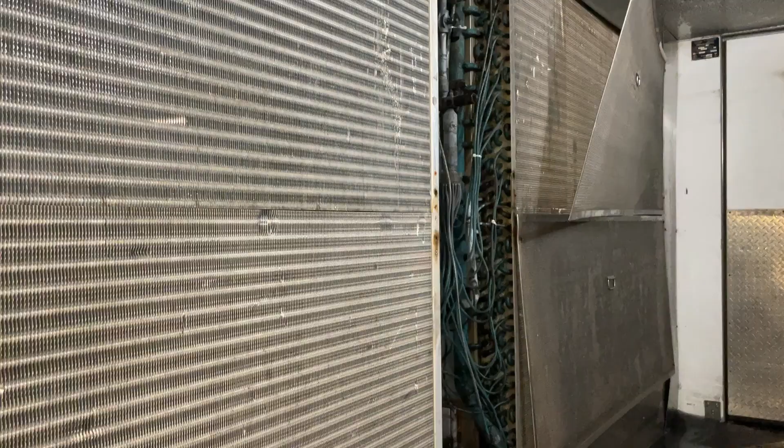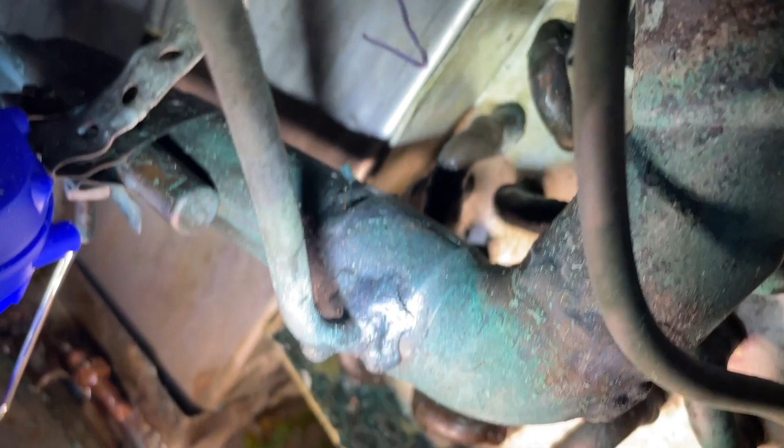Working in this big blast chiller today on this coil that has a really bad leak, and it's leaking right, no, that's not in focus, but it's leaking right there. You can kind of see where that U-bend is almost like cut down into the steel.

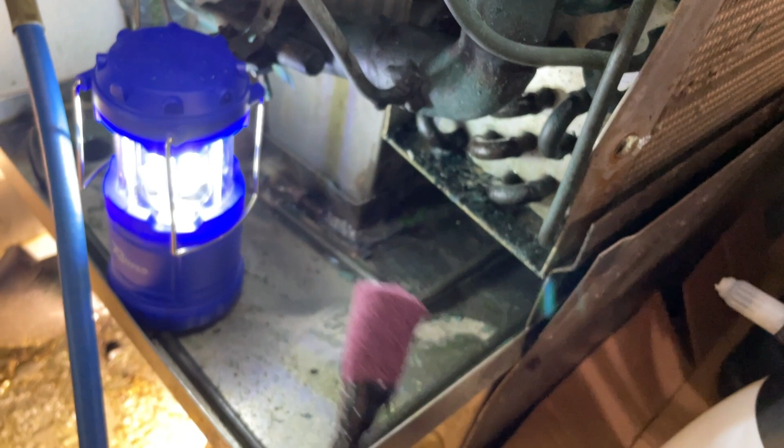The plan is going to be to clean it up really good, and taping a Scotch-Brite pad onto an extension is one of my favorite ways, although it's still very difficult to clean that way. And then we're going to flux it really well and use Safety-Silv on it. And the idea is just to bond the metal to the copper, and in the process fix the leak. So we'll see how it works.

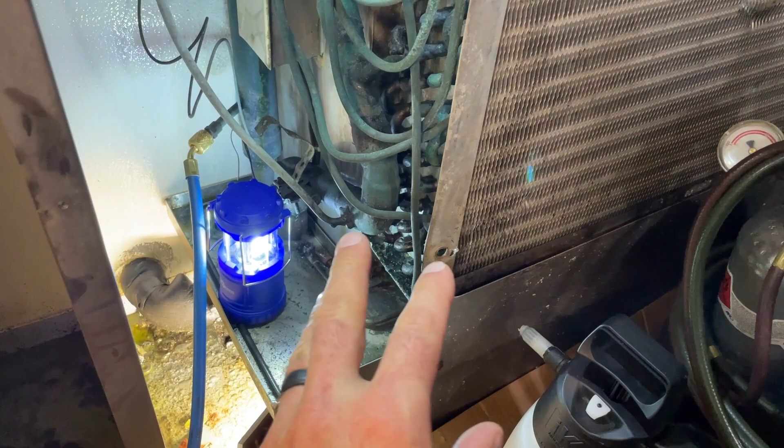If it doesn't work, and I've showed this before, we'll just have to eliminate that circuit. I'm not even sure this coil's made anymore. This unit's like from the 80s.

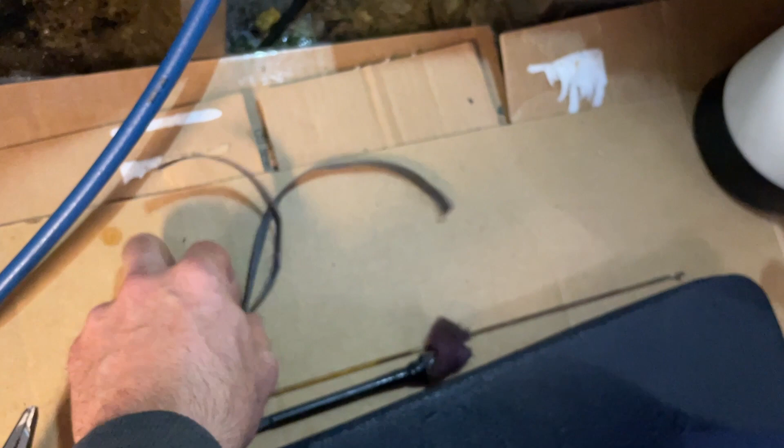I've got it cleaned up now as good as I can get it. So I used the bit and also a really long, narrow thing of sand cloth, you know, doing the whole back and forth saw action, and then of course rolling it up and using some needle nose to get in there.

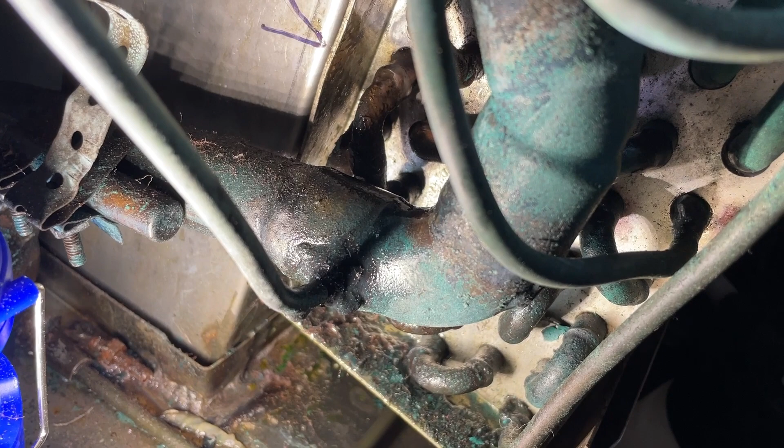So now it needs flux, because you have to use Safety-Silv on steel. You can't use anything with phosphorus because it'll create iron phosphides. Anyways, you have to use the flux, because without the phosphorus, you're not going to have any fluxing action whatsoever.

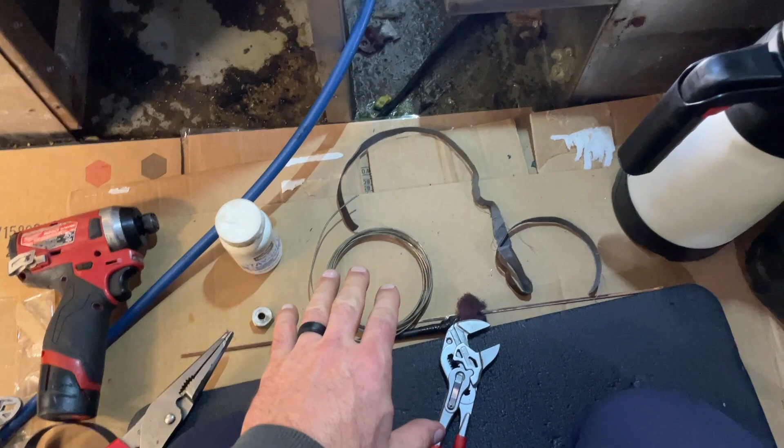This is Safety-Silv, and it's like 45% silver and the rest is copper. It flows really nicely. In fact, it's better for this because it'll flow in. Sil-Fos is better for filling gaps and things like that.

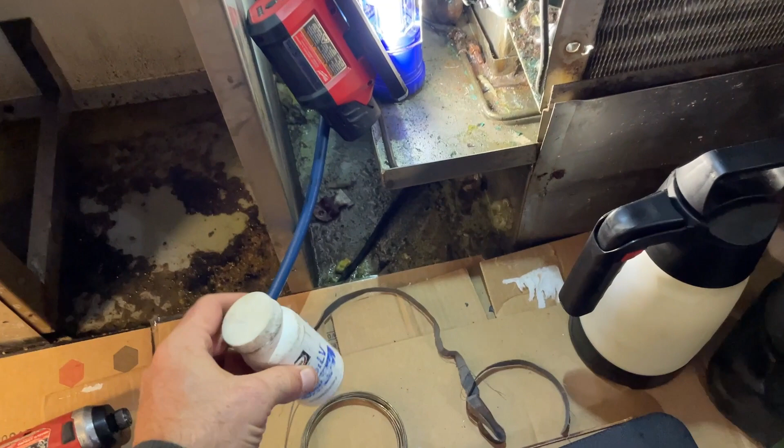And this is the brazing flux I'm going to be using. Harris also makes a black brazing flux, and it has a higher activation temperature, and it's really good on stainless steels and things that you have to get a little hotter than normal to braze.

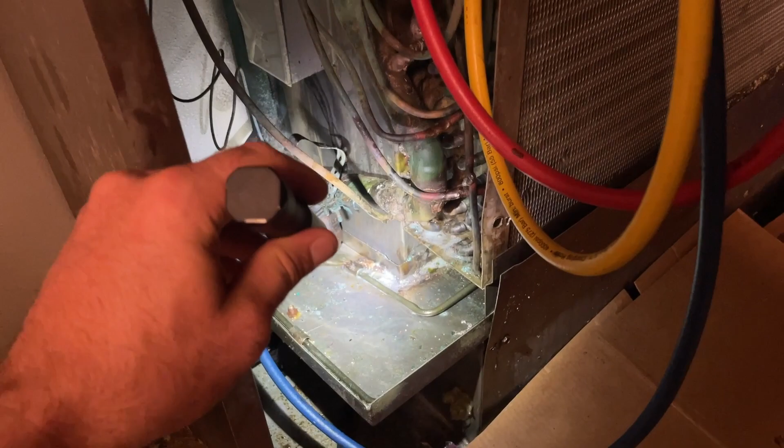Heard some crackling down in here, and the pan heater was all shorting out and everything. This site is just a real can of worms. All right, I want to find out what voltage this thing is so we can try to get something to take its place, and I'm just going to try to go generic on that. So I want to find out the voltage.

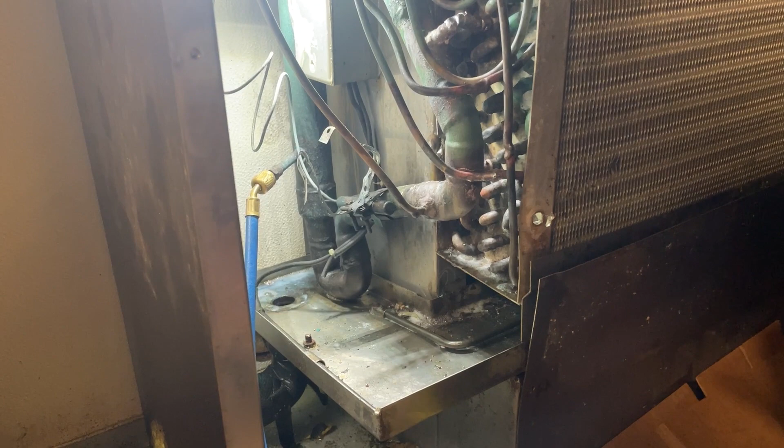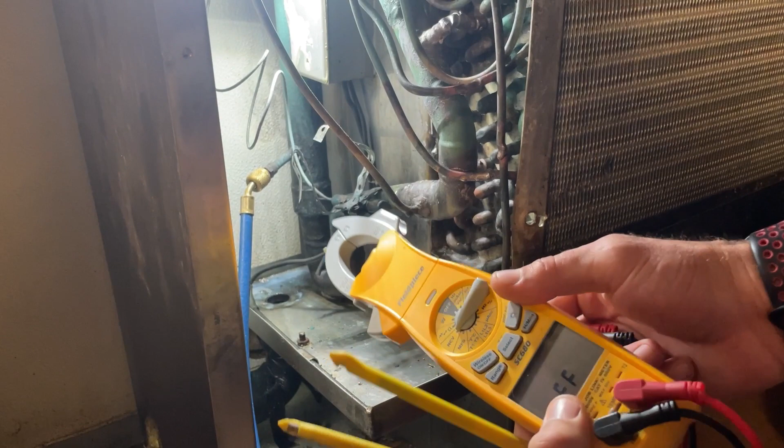Now, there's a couple ways of doing this, but one of the easiest ways, at least in this space, is just going to be to tap into it. So I'm going to use these wire piercing probes, and I've got this in no contact mode, so see we got voltage there, and this is how these work.

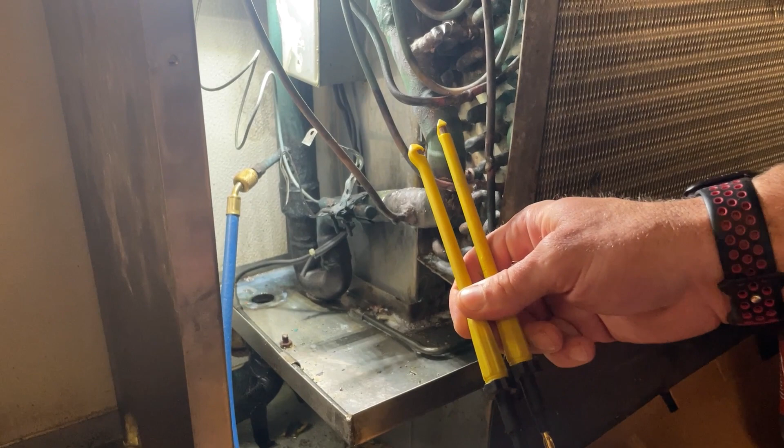Now I should say this is my favorite set by far, even though technically the rating is not high voltage. They are fine in my opinion, but I wouldn't recommend that you use them. All right, so you can see there's a needle that comes up there and pierces through. So I'm gonna do these, and then I'll show the voltage.

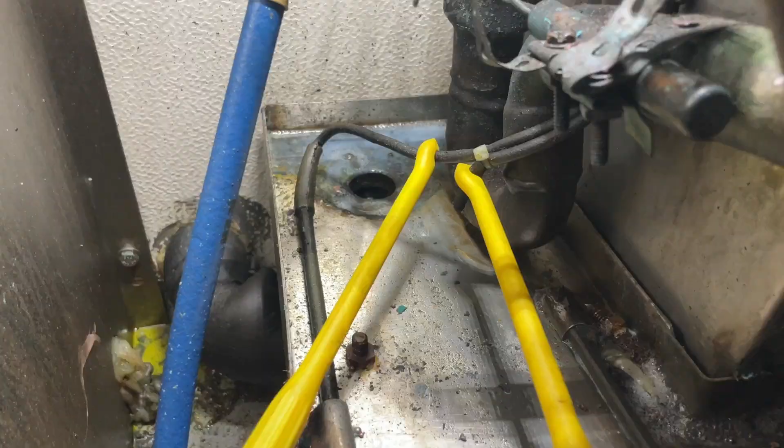All right, I'm tapped in right there, and we got a 120 volt heater, so that's what we're gonna get at the supply house.

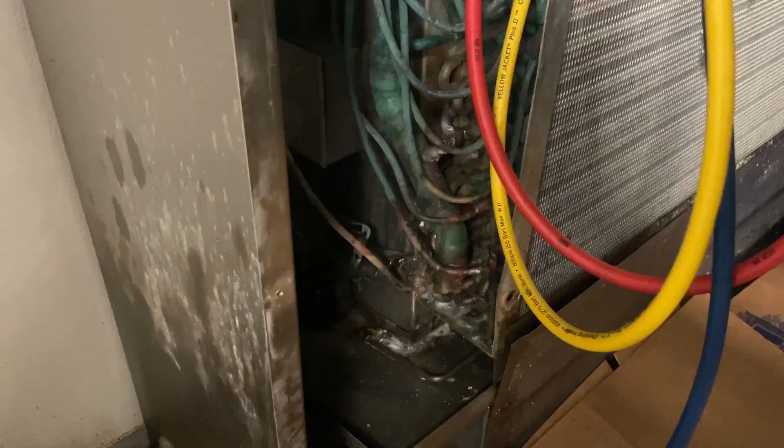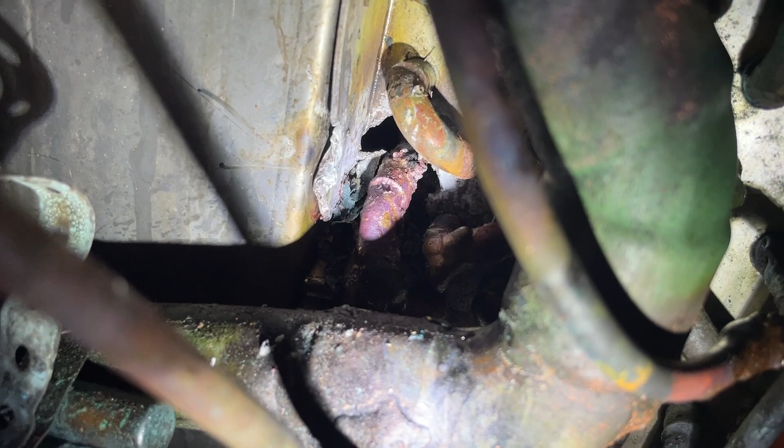I made a pretty bad mistake yesterday and turned something into a big old pile of dog shit here. So you see that like burned out? It's not in focus. Hang on, give me a second. There. Yeah. I don't know why, but I was thinking this is steel. It's not steel, it's aluminum.

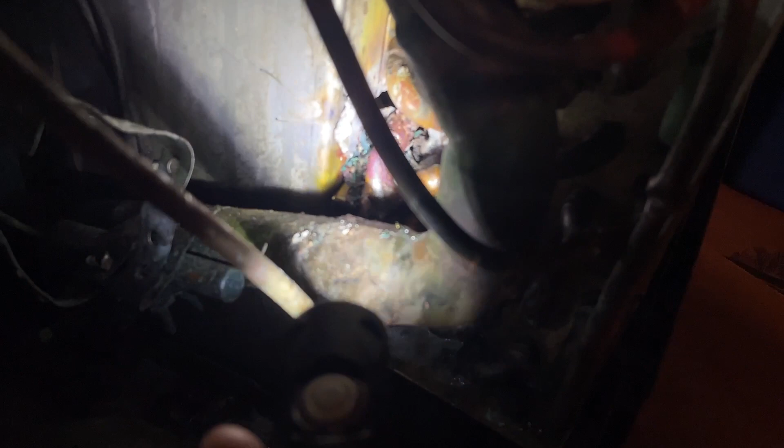So, you know, I noticed it starting to melt and then realized it was aluminum, and I tried to melt it out so I could braze the copper, but by then it was already contaminated. And it would not take the braze because that aluminum was like mixing in with everything.

But it ended up working out, I think, for the best, because this area of coil is just so bad that there's nothing we can do about it. You know, like once we got that leak fixed, another one showed up, then another, and we kept having to go up higher. And that's not uncommon when you have a coil that's in this poor of condition.

And so what we ended up doing is removing a couple circuits, and I hate doing that, but it's going to decrease the efficiency, but it's going to get them up and going. And that's one of the big goals with refrigeration. And you know, they can replace this system, and they need to, but they can do that. The goal today is just to get them going.

I wanted to show that, you know, as a tech, you have to embrace mistakes. Well, as a human being, you have to, because that's how you learn. And when I say embrace, I don't mean enjoy. I hate making mistakes, but it's part of life, and you gotta embrace them and admit to them and all that good stuff. It's part of the life journey.

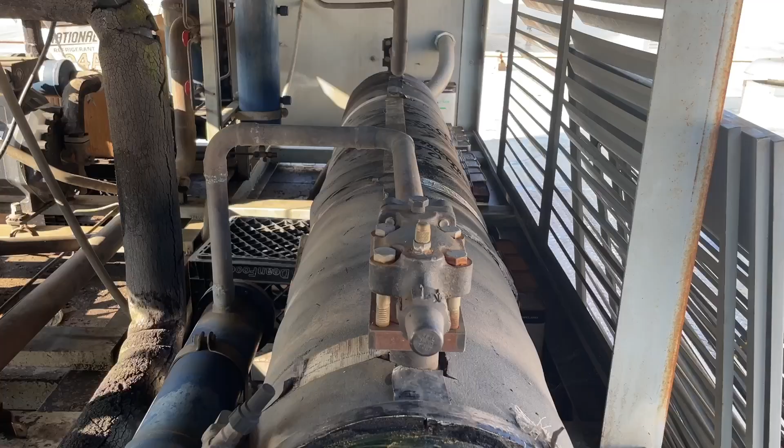Okay, we fixed another one there, but didn't take that circuit out. It held pressure overnight, which is a real great sign. So we're gonna move on to calculating the charge, and I'm gonna show some real cool things about that. Here's our big old receiver, and we need a length measurement and a diameter. I'm gonna find out how much refrigerant is in this thing, and I'll show how to do that, and then we're gonna calculate how much we need.

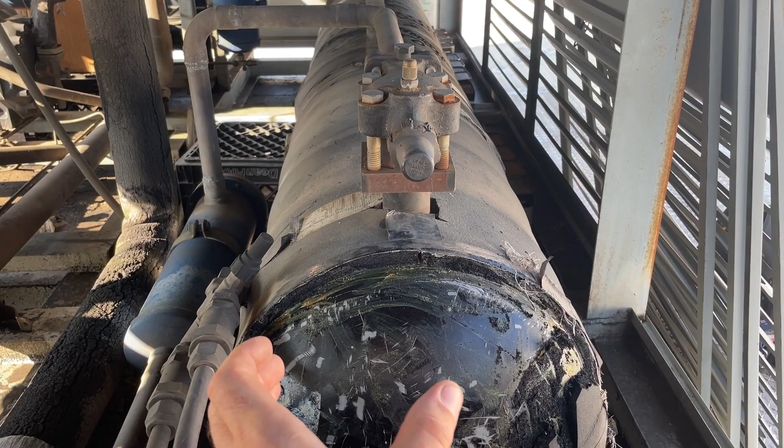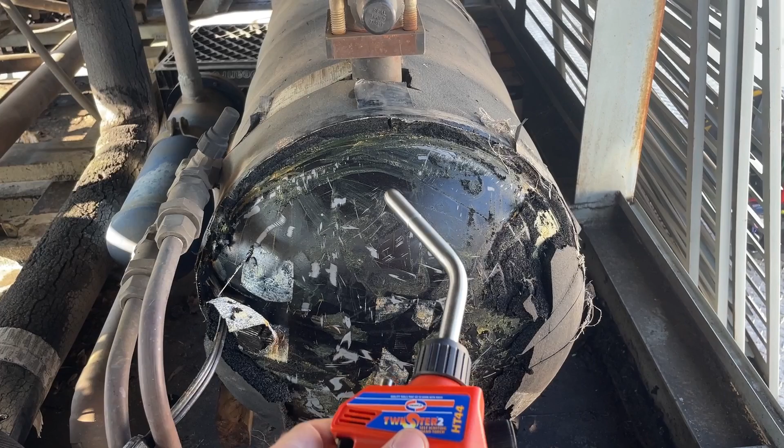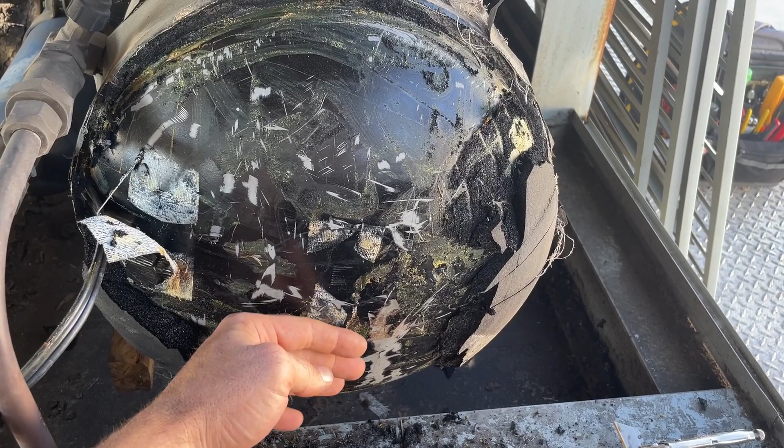Now, the calculations for a vertical cylinder are pretty easy, but when you're trying to calculate volume for a horizontal cylinder, the math gets a lot more complicated, but I'll go over that. So anyways, what I'm gonna do is I'm gonna get this end cap nice and hot, and then I'm gonna look at it with thermal. I'm gonna see where the liquid level is. You can also feel, and you'll feel it'll be cool, cool, cool, and then it'll start getting hot as you start to heat the area of the receiver that's nothing but vapor.

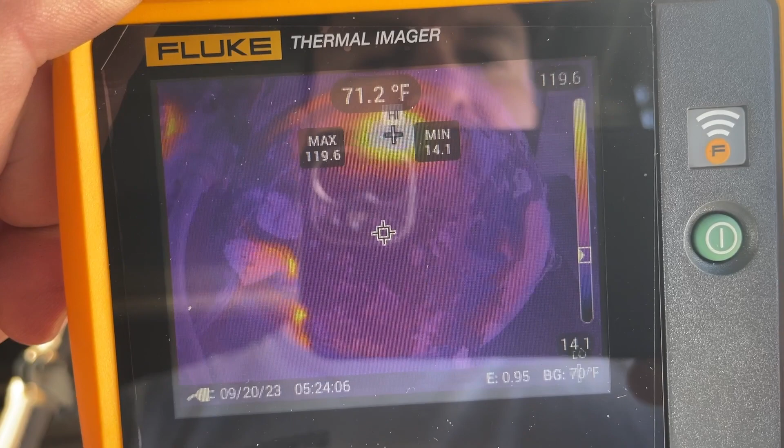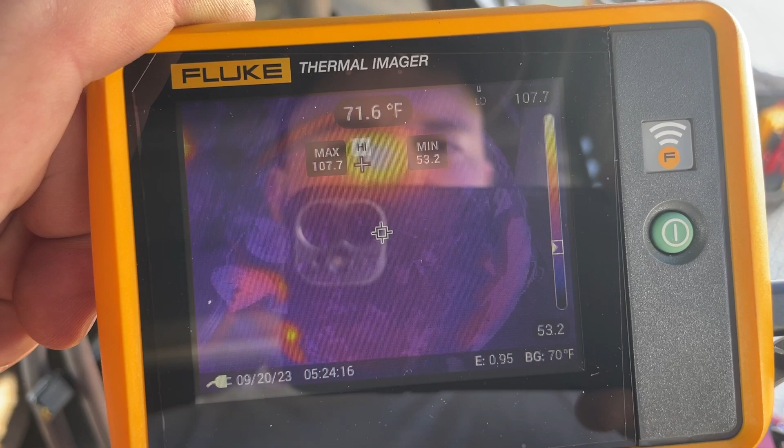To heat this, you just want to evenly run it across the surface, up and down, up and down. And with the thicker wall, you just want to make sure that you got enough heat where it's soaking through into the refrigerant. Wow, I don't know how we got this lucky, but we're not missing a lot of refrigerant. So there's the vapor line right there at the top. Everything else is liquid. That is phenomenal.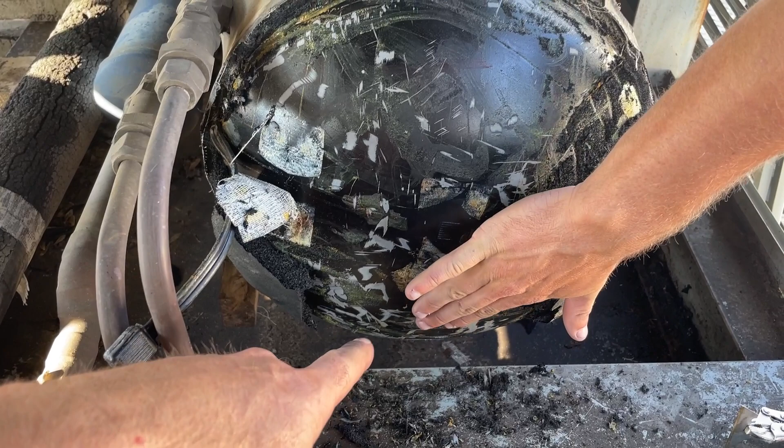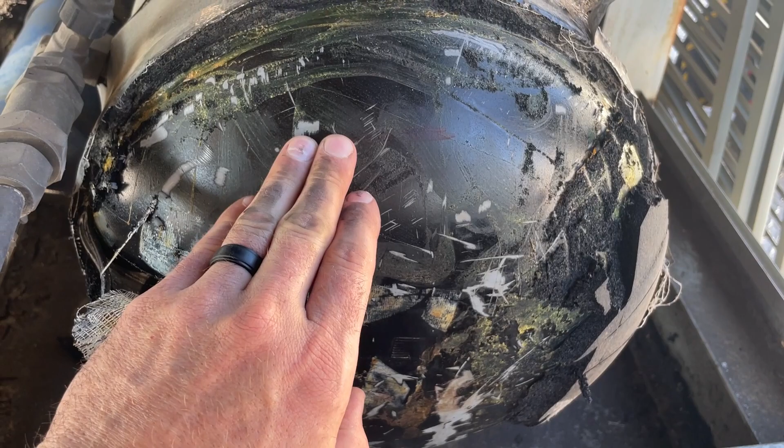All right, go ahead, broski. This is how you would do it without thermal. So it's cool, cool. And you're being careful so you don't burn yourself. Come where you feel the difference. Right in there, right in there. And that's where we marked with the thermal. So there's definitely, you can feel, it's a surprisingly sharp temperature gradient between the two halves right there. Bottom of the line and the top.

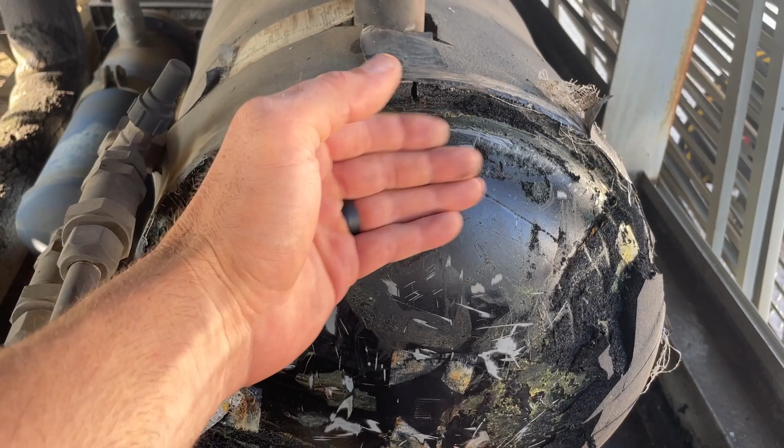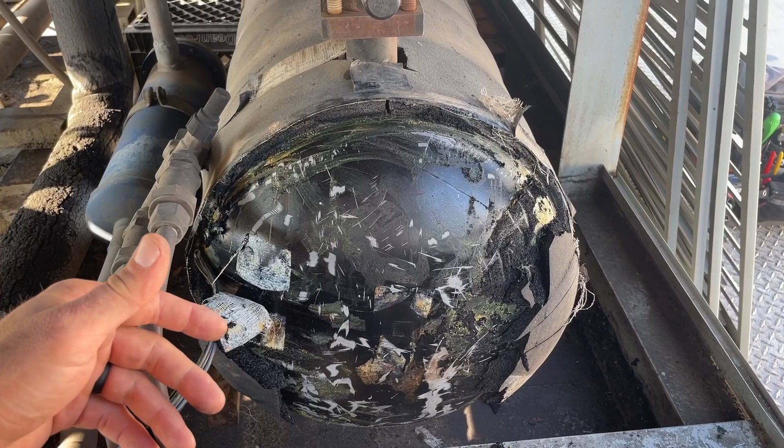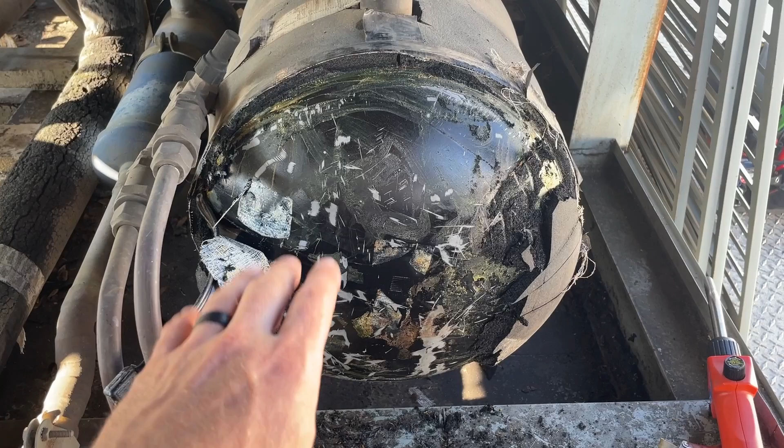Now, your goal on receivers is basically, when the system is pumped down, to be at like an 85-90% fill, somewhere in there. You do want some head space, but you want a lot of liquid in there, especially if you got a headmaster. You know, you don't want to just clear a sight glass. You got to clear the sight glass, and then you got to make sure your receiver is full. It doesn't look like we need to add refrigerant to this. I believe we caught it fast enough.

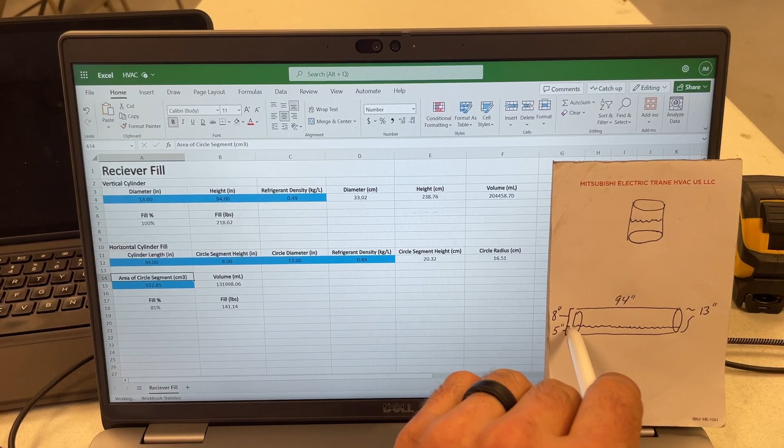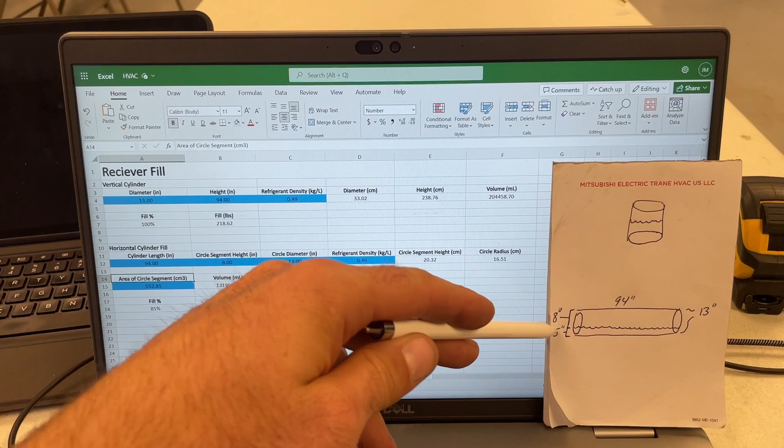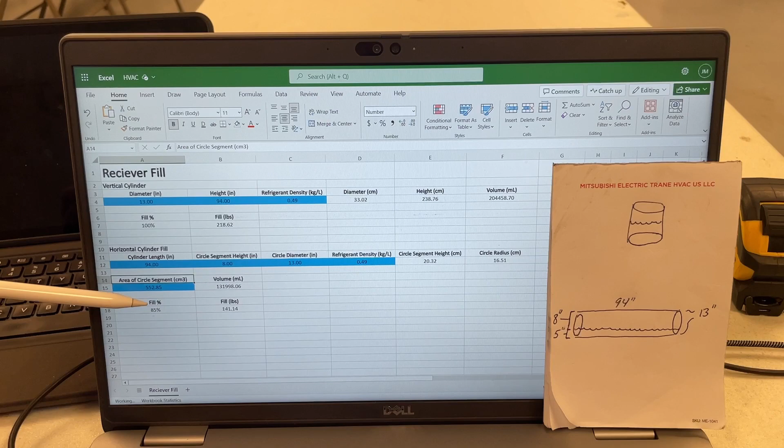As I already mentioned, when the receiver is vertical, it's very easy to calculate the volume because it's just the volume of a cylinder. But when it's horizontal, it gets very tricky because you're not dealing with a cylinder shape anymore. But in the case of the receiver we were working on, let's say the liquid level was up 5 inches. Then I built a calculator here to calculate this volume right here, this 8 inches of volume. And then of course, use the refrigerant density, this is 404A, to calculate the fill. So if we were 8 inches low and we wanted an 85% fill, we would use this amount in pounds.

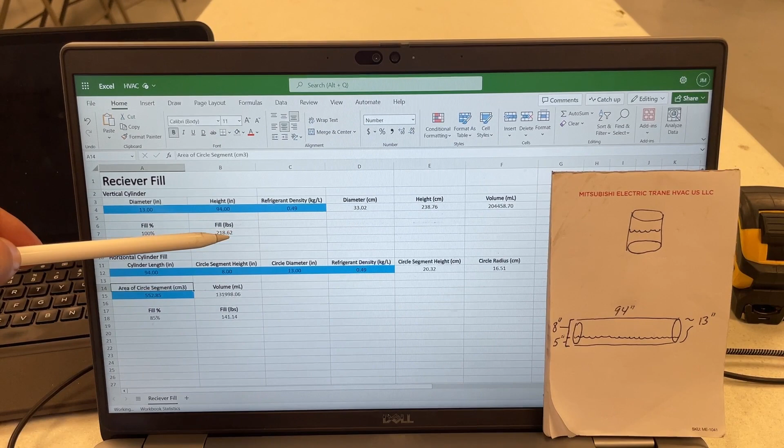I prefer the metric system, but the way our tape measures are and scales, I do everything in imperial over here, but the math for this gets complex. It's one of the reasons I wrote a formula for it, so I just do it automatically.

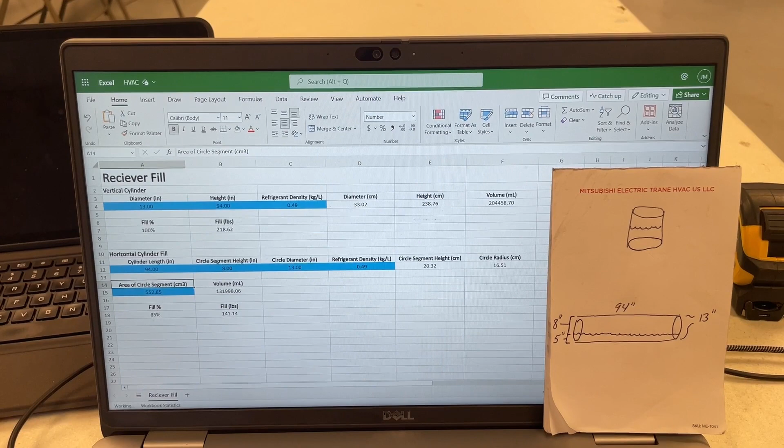Anyways, that may be all I film. I'm not sure. I'm gonna probably move on to something else and let another tech wrap this up. So it's gone about as good as I could hope for. This is a rough system to work on. It's not my first rodeo on that system.